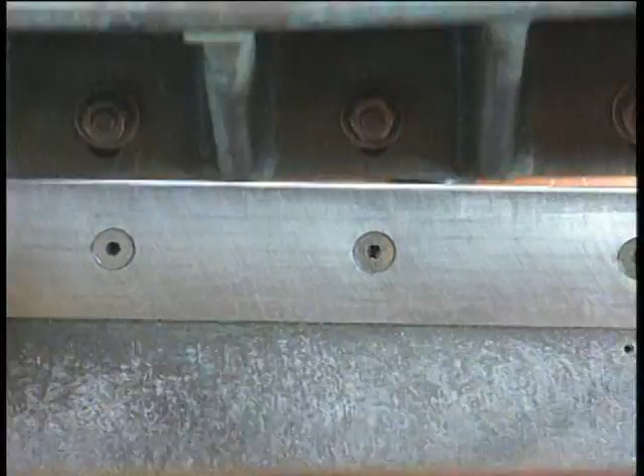In most shearing operations, the edges of two knives, a fixed lower blade and a vertically moving upper blade, meet progressively from one side of the workpiece to the other to shear the material like ordinary hand shears.

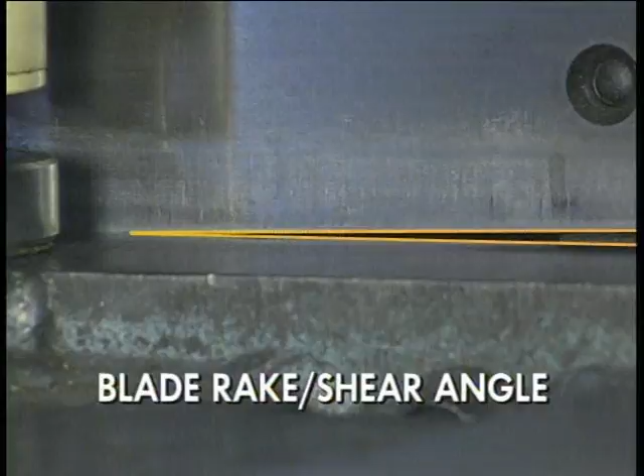The angle at which the upper and lower blades are aligned with each other is called the blade rake or shear angle. The distance between the upper and lower blades is known as the blade or knife clearance. Knife clearance is essential for proper shearing and is modified for different material thicknesses and strengths.

As the blades come together and contact the workpiece, they partially penetrate the material. This builds up opposing forces in the stock. A crack or tear called the slip plane then develops on both sides of the material, separating the stock.

The shear blades typically penetrate the stock no more than 1/3 of the stock thickness before the slip plane occurs. The exact amount of penetration varies with material hardness and knife clearance.

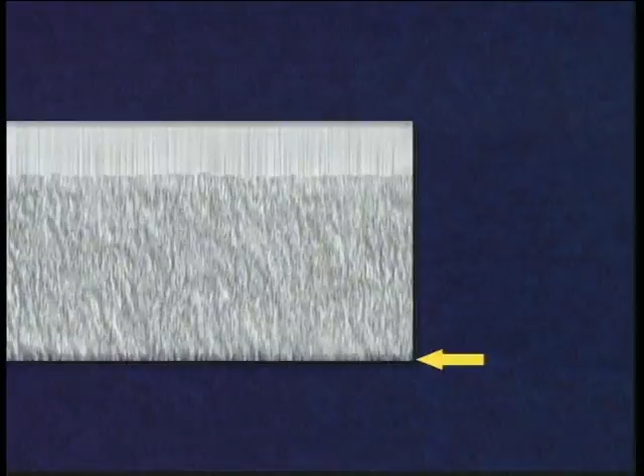On most shears, the upper knife is aligned at an angle to the lower blade of between 1/2 and 2.5 degrees. This angle helps concentrate the shearing force in the exact area of blade engagement between the two knives and starts the fracture on a straight line parallel to the surface of the knives.

This inclination also causes the upper knife to move away from the lower knife during the shear. This ensures that the sheared workpiece, called the drop, will not become wedged between the two blades.

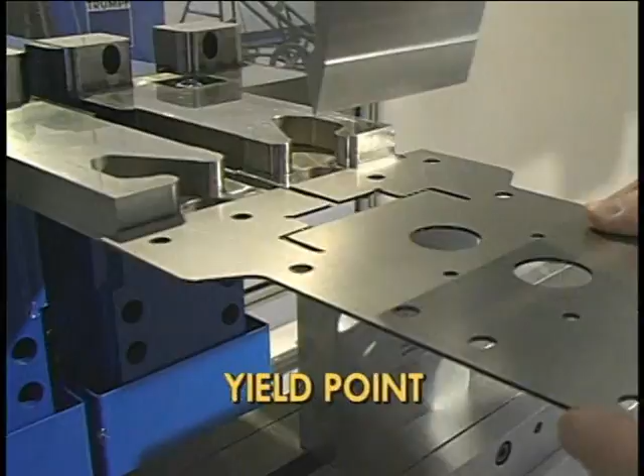Bending is a method of producing shapes by deforming the metal beyond its yield point, which is the material's capability to resist permanent deformation, but not past its ultimate tensile strength, which is the metal's ability to resist tearing.

The forces applied during bending are in opposite directions, just as in shearing. The bending forces, however, rest between the material's yield point and its tensile strength. In shearing, the forces used are well above the material's tensile strength.

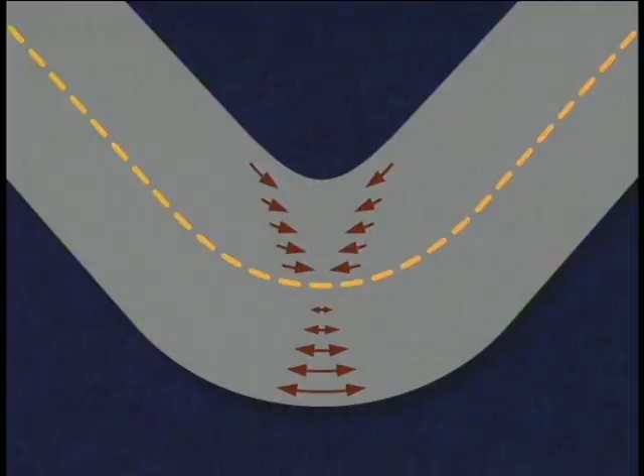As the part is bent, it undergoes a distortion so that the material outside the bend is forced to stretch under tension, and the material inside the bend is forced to compress. Between the tension and compression zones is an area where the material is neither forced to stretch nor to compress. This is called the neutral axis.

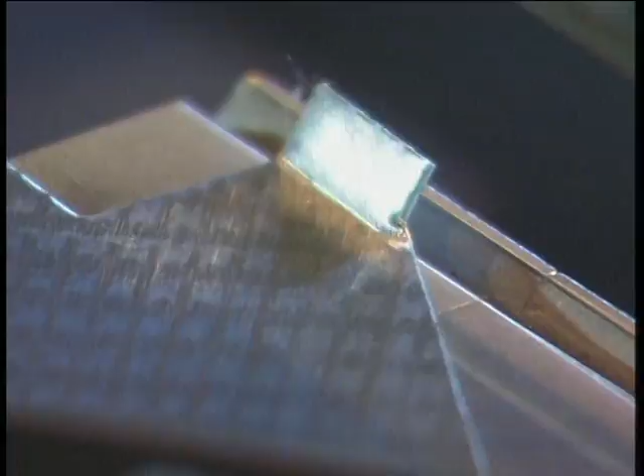The neutral axis is important since bending operations are calculated from its location. The extent to which a material deforms, whether in compression or tension, is proportional to the material's perpendicular distance from the neutral axis.

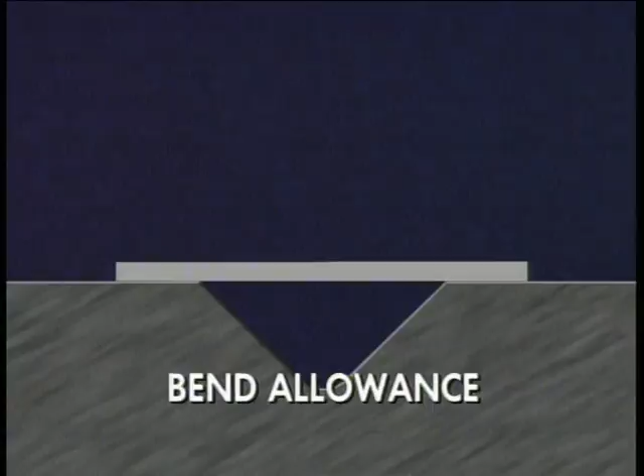The principal terms used to describe bending on press brakes are bend allowance, bend angle, bend radius, and spring back. Bend allowance is the pre-bent length of material that must be included in a blank to allow for any deformation that occurs due to the bending operation.

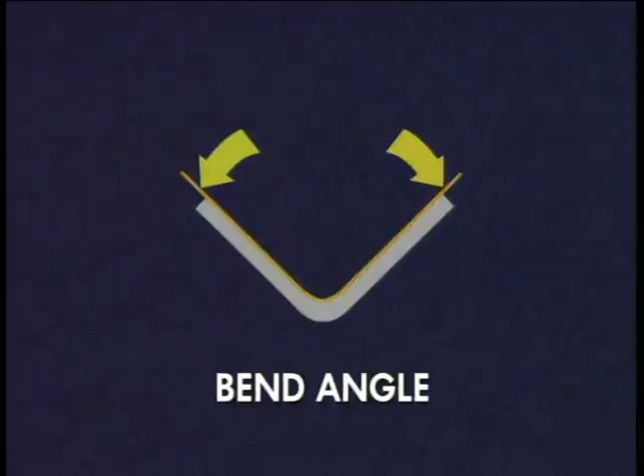The bend angle is usually the included angle of the bent workpiece. It can also refer to the supplementary angle formed by the two bent tangent lines. The bend radius is a tangent line where the flat, straight section of the part stops and the radius of the bend begins.

Spring back is the tendency of the material to return to its original form. Spring back typically ranges from 2 to 4 degrees.